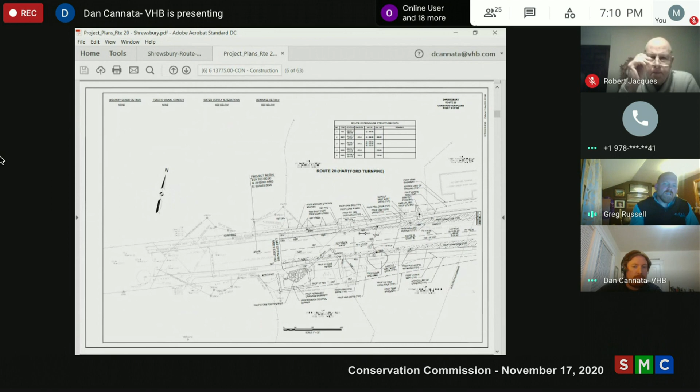So just a broad overview, Mass DOT's intent is to essentially carry a 4-lane cross section of Route 20 from Worcester all the way through Shrewsbury, Westboro, and continue that 4-lane cross section. Part of this work involves widening to accommodate that 4-lane cross section, starting at the bridge and moving east. We're actually going to pretty much a 5-lane cross section due to turn lanes as well.

As you can see here, most of the widening is on the south side of Route 20. This also involves reconstruction of the Lake Street intersection, which will be the main driveway to the new Edgemere crossing development.

The existing drainage system, well, there is no existing drainage system. The existing drainage is country drainage, essentially through this entire stretch. So we're intending to make this a closed drainage system, which will outlet, one portion of it, at the bridge on the south side of Route 20.

The remaining portions of it will outlet into detention basins located on the site, which will then outlet to the existing outlet in the back of the Edgemere development. So essentially, we're providing all new deep sump catch basins throughout this portion.

Going up the hill, you can see here on the left we have one of the detention basins where the state drainage will be directed into. There's a second one further up the hill on the next sheet, right here. These two basins will collect the majority of the drainage from the roadway, which will then get discharged out to the back of the site.

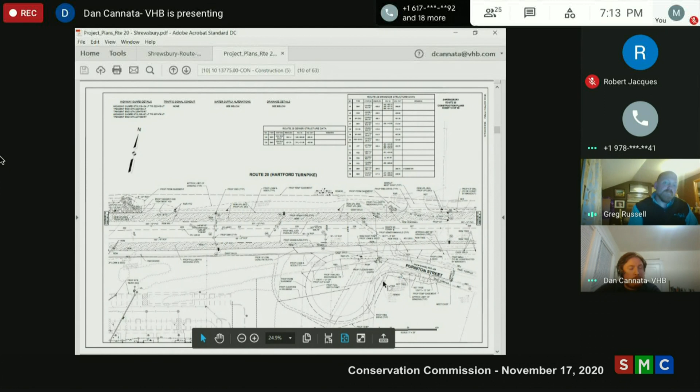That drainage will be moved across Route 20 to the north side, to the existing stormwater channel swale that runs along the frontage of the Triborough Crane and Botanist property.

One thing I'll mention is that this was designed to tie into MassDOT's future project, which runs from essentially this point east through the Grafton Street intersection and up towards the interchange. That project is still not being funded by MassDOT, so it's been pushed off, and they've directed us to tie into the existing cross section in this vicinity.

So the intent would be to end any widening just to the west of this easterly driveway to the Botanist. We'll curb off everything, but the entire drainage in this area on Route 20 will stay as it is currently, with the existing head wall. There's a pair of catch basins that discharge to a head wall just on the west side of the driveway. That head wall will remain, as will the catch basins, and the project from a roadway and drainage standpoint will essentially start at this point and move west down the hill.

Mr. Chair, I have a couple of questions. Bob, I think you might be muted. Bob, you're muted. Bob, did you turn your phone off? It would be star six.

Well, if nobody minds, I'll go ahead and ask. Thank you, go ahead.

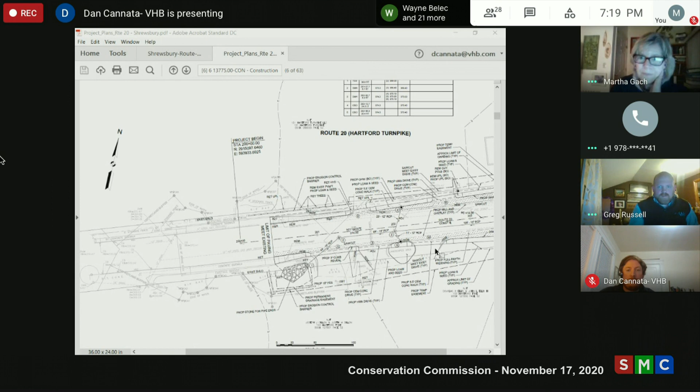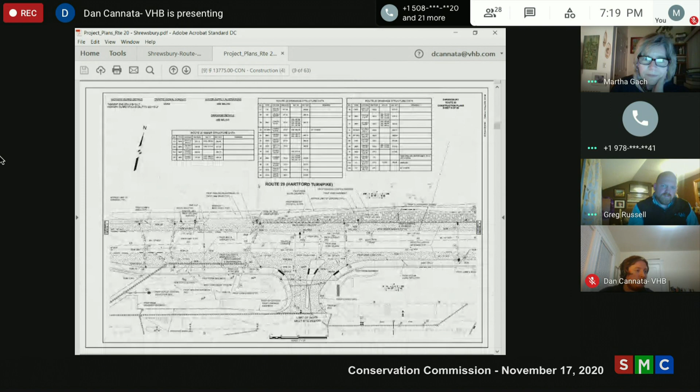So, if Dan, if you go up a few sheets here. So this side, the channel that we're tying into, one more sheet up. So the channel that we're tying into is intended to remain, and it actually bypasses that detention basin. There's a stone channel that runs along the base of the slope that goes into a drop inlet, which then goes underground to another one and then out.

We're not intending to really increase the amount of water going into that at this point. We're essentially maintaining all of the existing structures to the east of that which currently go into that, that are collected by that drainage. We'll be curbing off the entire area in front of it and collecting all of that and sending it to the south side. So we should be minimizing any additional drainage that goes there.

There is the drainage from Purinton; portions of it technically make it there currently. So it's really only a portion of this bulb that would be added over to that side.

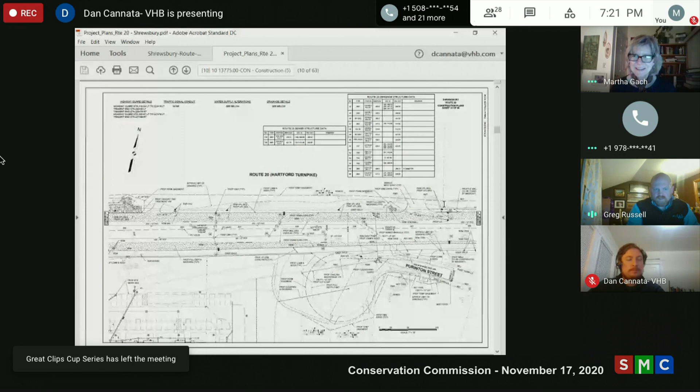I don't see why not, but we usually specify a New England wetland seed mix when doing those. Okay, great. We have, yep. All right, thank you. I'm all set, Bob. Well, thank you, and thank you for taking the initiative there.

I found out that you can push pound six all night long and it won't unmute it. Star six.

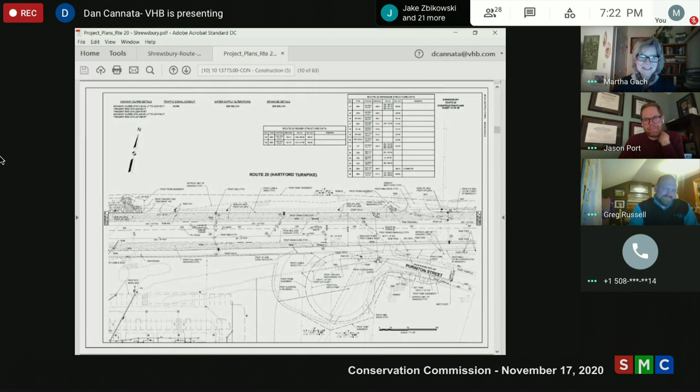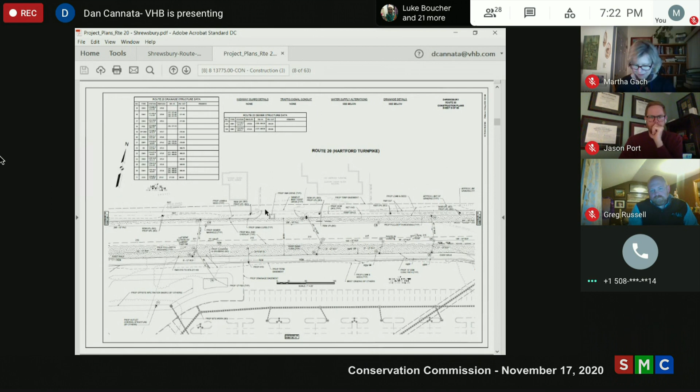Jason, any questions? No questions at this time. I have a question of Brad then. Brad, will this affect any changes to the Edgemere permit order of conditions itself? My opinion on that is no. Okay. Are there any questions from the public, from any other participants on this call? If there are none, we'll close the hearing. Thank you. Thank you.

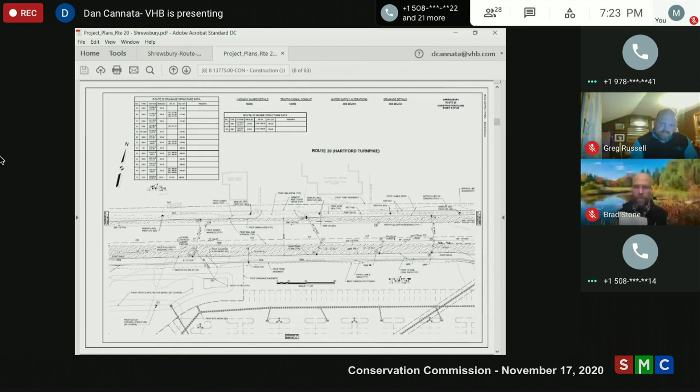And moving on to the next item, 25 Wall Street. Mr. Chairman? Yes. Hi, this is David Sadowski. I've been having trouble reaching the site via my computer. I finally called in. I was supposed to represent the client for 7 Forest Avenue. I know I picked up at the very end when you went into this last hearing. I don't know if you want to wait till the end to revisit that. I'm sorry. Well, if you're ready to go, we'll go now. All right, very good.

Again, my name is Dave Sadowski. I'm the principal of DJ and Associates, and my client is Mike Berdoni. We had been given a list of 22 comments by the conservation agent, Brad Stone. I put together a letter addressing all 22 points. We went from a 1-page plan to 5 pages, 11 by 17, so that we can make it easier for everyone to see what was happening at the site. We actually went out and checked the roadway as was suggested to see where the actual travel way was. We had more room. We provided 3 parking spaces to go with the proposed garage.

And where we had put the recharge system within the 25-foot buffer, we moved it outside of that. We reconfigured the stairs off the back of the building; there's an old electric easement in the back. We made sure that nothing is in that easement now. We came down the side of the building. We showed sidewalks, utility connections, and the like. I know stuff wasn't submitted until yesterday to Mr. Stone, but a complete package was sent to Brad and also to DEP at the same time. Also, the building inspector from Westboro received the same package. I'm open for any questions.

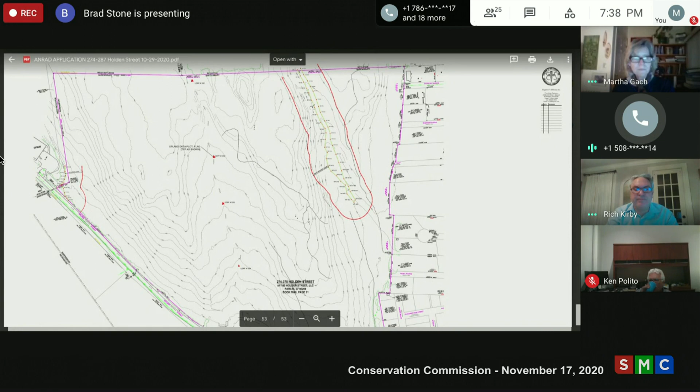Thank you for that, Mr. Kirby. And any questions, Martha? I have no questions. Jason? No questions. Mr. Polito? No questions. And I'm going to ask Brad to comment on this application.

Brad? Sure, I did look at this a couple of weeks ago in the field for the commission. For the most part, I do agree, regarding that middle channel, a lot of that does look like it's not a wetland and wouldn't be classified as a stream. There were some areas that I did question, although I can certainly see the argument going in either direction. At the end of the day, I think it would be best if the commission got somebody with a little bit more expertise than me on this particular one and had a peer review consultant look at it. And the one question I did have while Mr. Kirby's here is, for some reason, the upper portion of that stormwater ditch, as you described it, has got blue flags on either side of that channel near the northerly section of the site. Do you know why those are there by any chance?

I do not. Well, let me back up for a moment. Portions of the site are also within priority habitat for rare species. And so we have been working with Natural Heritage to determine if any preferred habitat occurs on the property. And so we've been delineating some preferred habitat and some transitional habitat on the property with flagging that is being picked up by the survey.

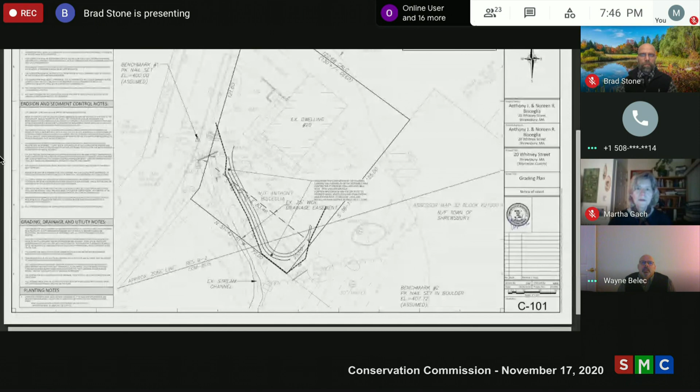Thank you, much appreciated. So as you can see from the plan, north being straight up the sheet, the area and the easement to which I referred to earlier is toward the west side of the lot, the right front corner of the lot. What we're proposing is to regrade that area, as Mrs. Bisceglia and her husband are in their senior years, and the slope in that area is just becoming a little too difficult to negotiate for her husband. The other reason is that, with the ponding water that comes up onto the site, it just limits the use of their yard.

When I had gone out there this past summer, I spoke with Mrs. Bisceglia about the amount of water that she received on her lot and how much it surcharged. She indicated to me that the problem had occurred roughly 10 years ago when a down gradient abutter by the name of Joe LaJoy, who lived at number 16 Whitney, had a culvert that had collapsed. It could have been an old CMP culvert. He replaced it with what she and one of the neighbors believe was a smaller culvert, the 24-inch RCP. Since that time she feels that has served as a restriction, ponding water back onto the lot.

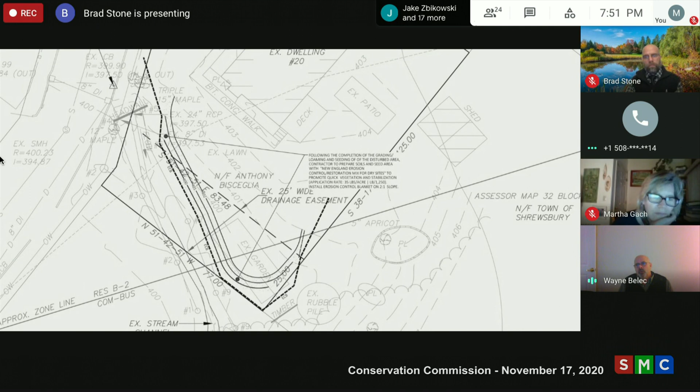Again, not having the benefit of a topographic survey of some 10 years ago or so, I'm just going based on her testimony as to what she's experienced out there. So back to the bordering land subject to flooding, I looked into Brad's thoughts that perhaps we were doing work within the bordering land subject to flooding. Based on the information that my client indicated to me, the elevation that the area ponds to, if you recall, I indicated that during times of heavy rainfall, it ponds to the base of the guy wire at

elevation 399. During these real heavy rainfalls where she gets total flooding and it tops the road, that comes up to about elevation 400. Now, elevation 400 is consistent with the top of wall, she told me, at the headwall as it enters onto the property, the road elevation, and that planter, or the garden. So we at LDC are looking at this in terms of the bordering land subject to flooding coming up to elevation 400.

With that said, if you look at the plan we proposed, we are filling the bordering land subject to flooding. As the commission knows, once you do that, you need to compensate elsewhere. So with that, what we're looking to do is to revise that grading. We'd like to get thoughts from the commission based on what we're seeing as bordering land subject to flooding, in order that we can take that grading, pull that back out so as not to alter any resource areas whatsoever on the property.

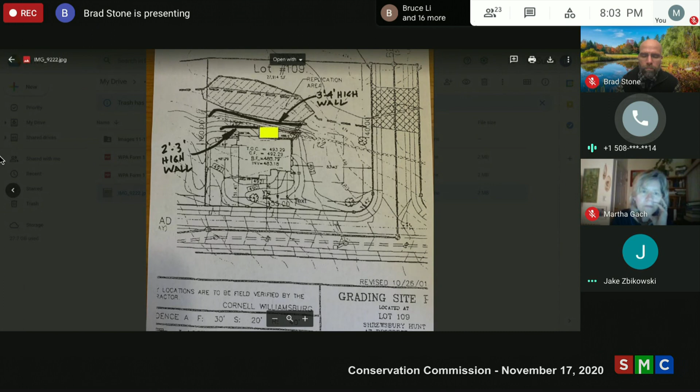What is the date of that order of conditions, Brad? Do you have it there? Hold on one second. Okay, no, I don't have the date. My recollection is it was the early 2000s, so it's pretty old.

So, Brad, just in terms of process here, we could do both, right? We could, if we chose, do a negative determination with a condition upon their applying for a certificate of compliance. You could certainly do that. There's nothing that would prohibit you from making this decision tonight absent the certificate. I would encourage the property owner to follow up with it anyway, just because they'll want to clear up the title at some point regardless.

Yeah, of course. But I looked at this closely to give the commission some comfort. I went out to the field Friday, went through the files. There was correspondence from way back that I had written to the current homeowner that I'd forgotten was there. So looking at the plans and the history, I don't think there's really anything out of compliance other than the walls that were proposed are bigger than what exists. I don't think there's been any wetland encroachment or anything like that. If there has been, it's very minimal and not something we'd catch by eye. Usually we find bigger things. So it either meets the plan other than the wall height, or there's very minor loss. But I don't see anything to be concerned about.

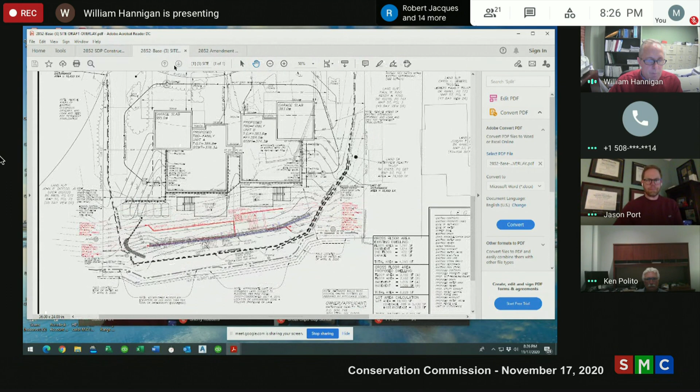This is, if I may, I think the biggest thing to look at, in my opinion, and it's not up to me to decide, is that what we didn't do was bring the construction any closer. We kept the line of the wall essentially where it was. And what we tried to do was make it so that the excavation that was going to be required for this basically went away. We don't have to dig all this out like we thought we were going to have to.

So it's actually simplified the construction of this retaining wall. The difference is that the biggest difference from getting closer to the shore is the construction of the stair system, which basically allows us to not have to do the significant excavation in this area here. So there's kind of a balance to it. That's what I'm trying to work with. And once again, this area here is more of a lawn area now, anyways. So it's going to be returned to what it is right now once we're done.

But I believe this is, quite frankly, my opinion is that this is a better design than the original one, and requires less excavation to actually build it. And it allows us to build the decks. And I mean, if... I know that the owners are on the call as well. So maybe we can talk to them about that, if there's something that we can do relative to that, that is definitely an improvement over the previous design.

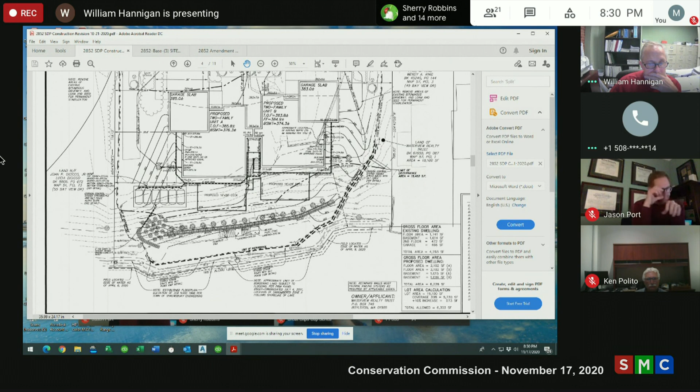And by doubling the size of the decks, I think that's in fact what has created this problem. Because I'm not personally persuaded that the geotechnical issues with regards to the deck footings can't be overcome technically. So I would agree with Ken. We approved the original plan.

I'm opposed to the doubling of the deck and to the creation of a 10-foot obstacle at the lake shore. And I guess I'll ask Brad for your comments, if any.

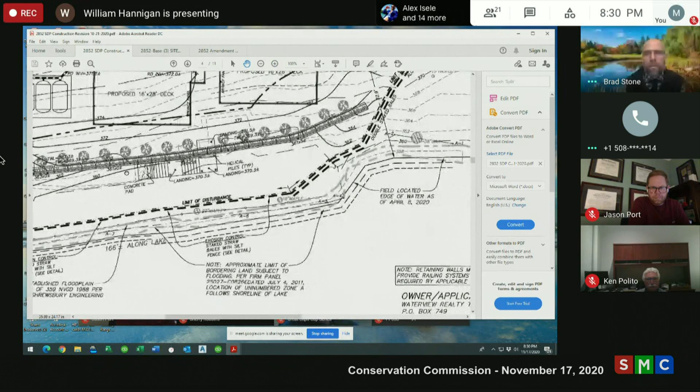Thank you, Mr. Chairman. I'd echo a lot of what the commission's already discussed in terms of concerns, but I want to bring up a photo real quick.

I happened to stop by the site when I was out there late last week, I think it was Friday. I was in the area doing inspections and mainly wanted to see the erosion control in advance of the meeting. I didn't have the plan set on me, or I would have taken measurements, because I wasn't expecting to see the wall being proposed tonight actually under construction. Looking at the site, the disturbance that's been done is not per the plan the commission's approved at this point. It goes above and beyond the limits they've approved.

As you can see, that erosion control barrier is pretty much right on the top of the bank. Look at the wetland flag immediately to the right in this photo. Getting back to the office and seeing the plans, I started getting concerned about whether that wall is actually being constructed where it's proposed tonight. When I scale the plan, I'm supposed to see 15 feet between the large maples shown on the plan and the erosion control barrier, which is in line with those. At least by eye, looking at the wall that's been started, I don't see 15 feet there. You'd have to go out and measure to be sure, but something doesn't look right to me. So I've got concerns similar to the commission.

Oh, I've lost the screen. I've lost the screen. Does it show? I think the label was extend fence. It's the northerly property boundary. I'm sorry, I lost. It says proposed new fence near the lake. Yeah, yes, that would be it. Is that fence indicated on the old plans too? Yes. Is that the line with the circles in it? Okay. Yeah. Squares. Yeah.

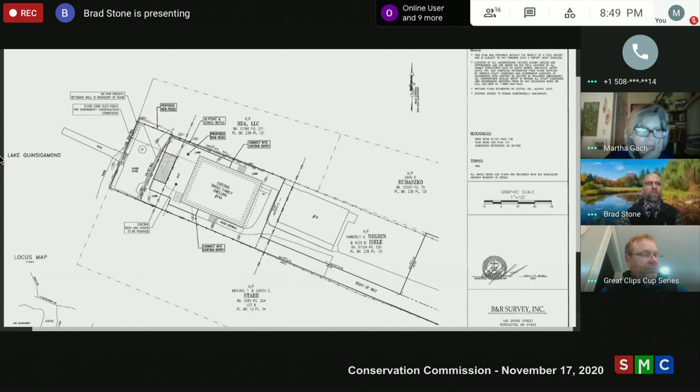All right. Are we ready to close this hearing, ladies and gentlemen? No, I have one more question. Where is the gap again, please? Excuse me? The critter gap, where would that be? Well, fencing is actually an exempt activity in the regs, buffer zone activity, as long as it doesn't provide a hindrance to wildlife passage. So we generally propose a minimum 4-inch gap at the bottom of the fence.

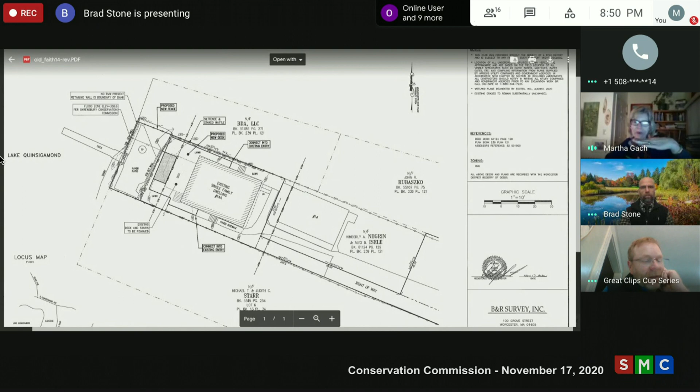That way the rabbits. Oh, okay. All right. Yeah, that's all. So the fence is set up 4 inches above the ground. Yeah, that's the standard that is generally used. Okay, gotcha. Thank you. We need to do that more with solar farm fencing. Yeah. Sorry. Yep. All right, I guess then we'll close this hearing. Thank you, Scott.

That concludes our hearings for this evening. We'll move on to the orders of conditions. And I could use some motions, Ken? No, you can't make the first one. No, I can't do the first one. Jason, a motion for the town of Shrewsbury roadway improvements to Hartford Turnpike. Just grabbing it up. Mr. Chairman, I make a motion to issue an order of conditions for the roadway improvements on Route 20 Hartford Turnpike submitted by the town of Shrewsbury. I don't think there were any additional conditions in that.

Second, Martha? There was a suggestion that pollinator-friendly plantings seeding be used on the retention basins. Correct. You're right, Martha. With that exception, that'll be added as a condition. Okay. And we'll take a roll call vote. Did we get a second? I thought you did. Was that me? I thought you had. Okay, perfect. Any further discussion? Hearing none. Martha? Aye. Jason? Aye. Ken? I recuse myself. Ken has abstained from this, and I vote aye.